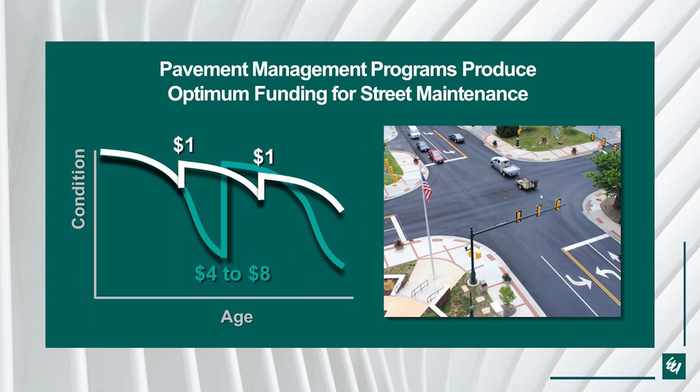The idea is that preventative maintenance can be done incrementally to extend the life expectancy at much lower life cycle costs, and that's shown with the white curve there. So we're going to explore this in terms of how we can measure the condition, what types of programs we use to extend the life cycle, and then how we can optimize that.

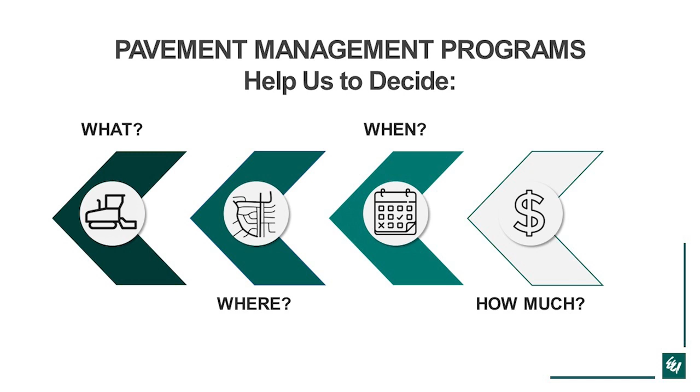Pavement management programs help us decide what to do, where to do it, when to do it, and how much it's going to cost. So that's kind of a forward viewpoint of the process—what are we going to do, where, and when? And then based on that, how much is it going to cost?

One of the advantages of pavement management programs is that, through software applications, we can actually do the reverse. We can decide how much we want to spend, and then the programs will tell us what, where, and when we should spend it. That's part of the power of this—being able to run different scenarios using the software programs.

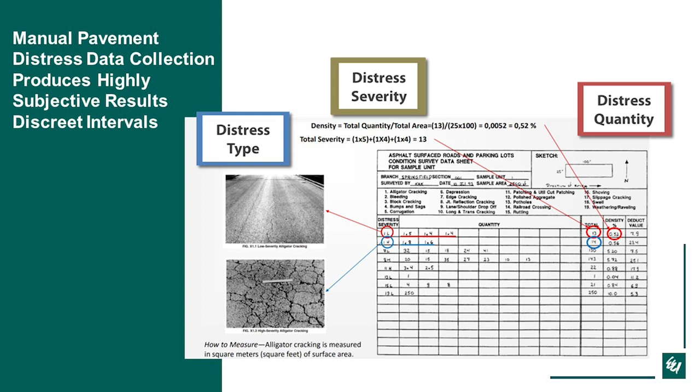And you can imagine how much time that would take for a community with 30, 50, 100 miles of roadway. So this is kind of the old style. It was pretty subjective, and it takes a lot of time, and it's only incremental. It's only done over certain representative areas.

Today's technology uses lasers, GPS, and video technology to get a continuous record of the surface condition. And there are deflectometers which can measure how the asphalt responds to an impact, which gives you an idea of the condition of the base and sub-base. So we can identify the surface condition and the subsurface condition.

In most instances, we talk about the surface or overall, and overall is surface and subsurface. So that's important to recognize when you're looking at a pavement condition index map. Is this map surface only, or is it overall, which includes the subsurface?

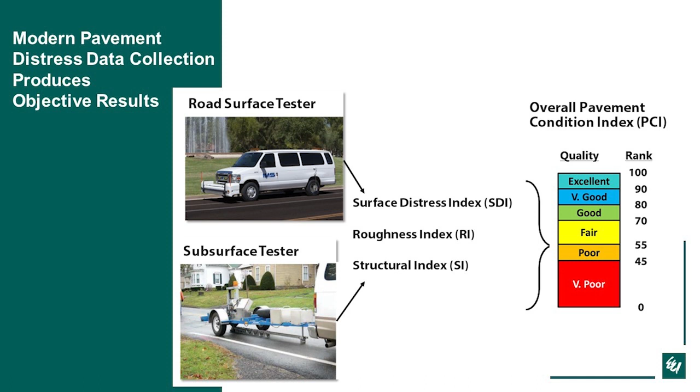The data acquired is then processed, and each block in the survey is assigned a pavement condition. You see on the right the quantitative rank from 0 to 100, and then qualitatively from very poor to excellent. We always use these same colors, and these colors carry through, so you'll see them on maps and other displays.

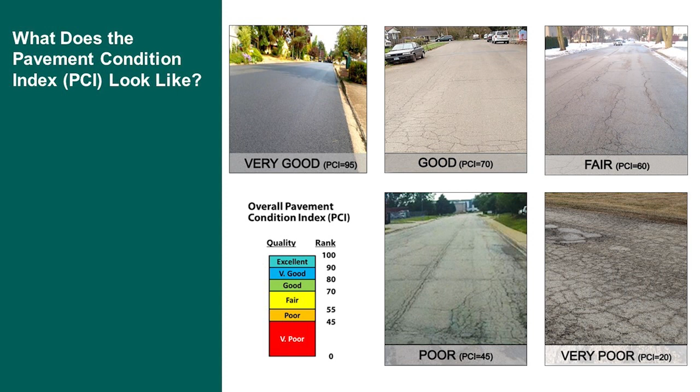And then into your poor, which is a PCI of 45, and then very poor, which is down below that 45. So in most instances, that fair is about the cutoff for where we want to start looking at perhaps resurfacing. We don't want to let it get into the very poor condition, because that's allowing moisture into the base, which is creating a problem that even resurfacing won't address.

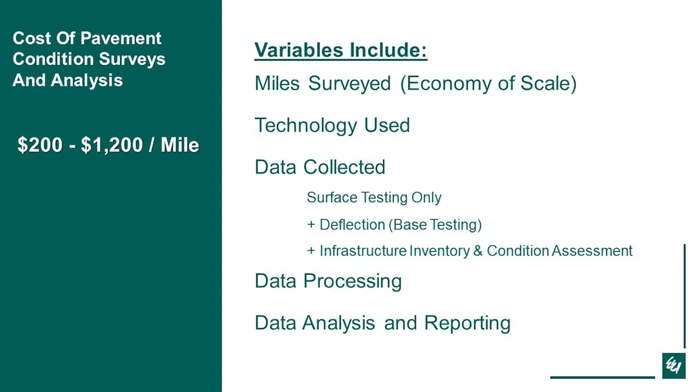And then, of course, the processing and data analysis and reporting. Many times you'll hire a contractor based on a bid and then use that data either in-house or with your engineering firm to interpret it and help you in developing your 5- and 10-year capital improvement programs.

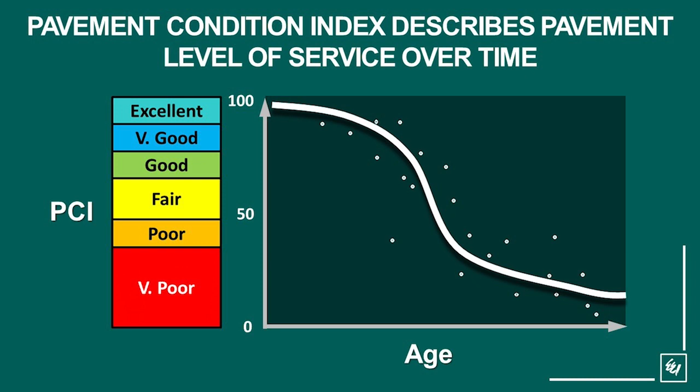The best case is when you've gone and done several surveys and you have the results on a block of roadway, and you can plot them over time, typically 3 to 5 year increments. So you can imagine if you could see a new pavement surface and how that deteriorated over time, that would be very beneficial in terms of predicting when maintenance or resurfacing would be needed.

Timely maintenance helps extend the useful life of our pavement. As mentioned, that normal degradation curve, resurfacing and then going back to degradation with no pavement maintenance is shown by that curve. What we would hope to accomplish is to intervene in that deterioration before we reach that break point and keep our pavement condition up and extend the overall life cycle. So how would we do that?

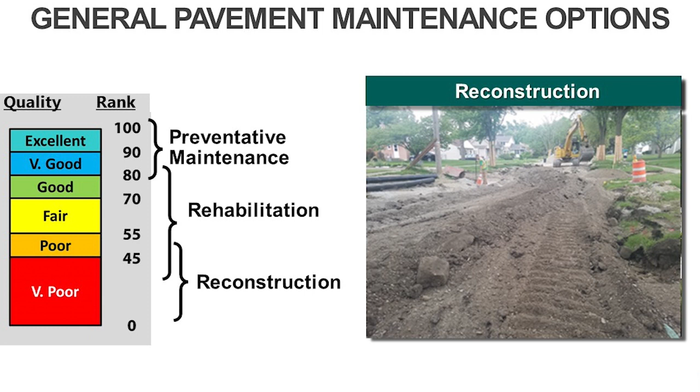We would do that through preventative maintenance programs such as asphalt rejuvenators or microsurfacing. Those things would be preventative maintenance in nature, and they would be done when the PCI is up pretty high. If the PCI was allowed to drop down, we would go into a rehabilitation phase where resurfacing or hot mix in place would be applicable. Chris will be talking about these different maintenance options in more detail in the coming presentation, but just to give you an idea. And lastly, if we've allowed the pavement to deteriorate and we've got subsurface that needs to be reconstructed, we're talking about a significant amount of money. So that's the pavement maintenance options we're looking at.

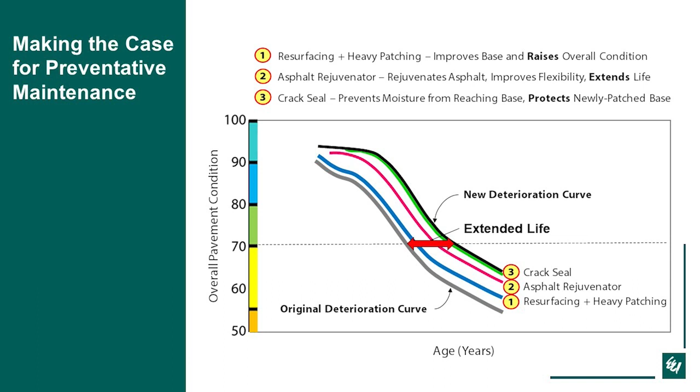The second curve here is shown with the asphalt rejuvenator. So now if we add asphalt rejuvenator, in those early years it stays better longer, and the curve gets moved out a little bit, with the top part staying a little bit higher. The last part is the crack seal, which helps prevent moisture from getting down into the pavement. Applying these pavement maintenance activities throughout the life cycle creates a new deterioration curve, and that curve represents an extension of the life cycle.

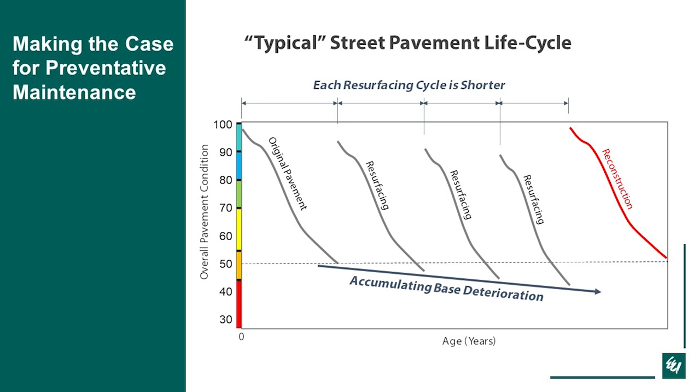If we take that idea and apply it to a life cycle of pavement, it might look something like this, where the original pavement would deteriorate over time, and then we would have a resurfacing, and so on. As we go through that cycle, each time the subbase deteriorates a little bit more, so the curve gets a little bit deeper. It's a little bit harder, that's why eventually we have to reconstruct. The cycles in which we have to come back and resurface are closer together, fewer in years, so the pavement surface doesn't stay at a high level of service for long, and eventually we have to reconstruct.

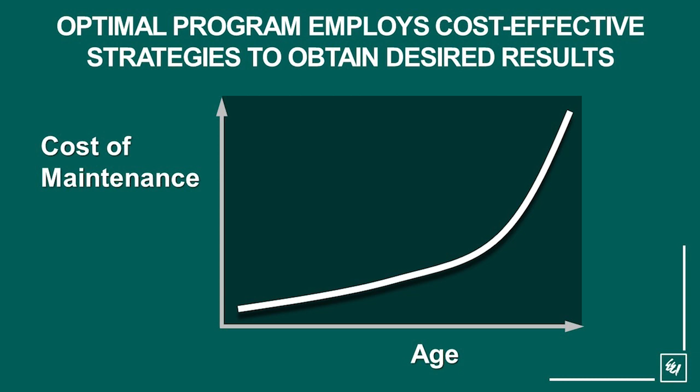So we've talked about measuring pavement deterioration, and we've talked about ways to extend the life cycle. Let's add costs now. What we see is that the cost of maintenance increases as the pavement gets older. There's a break point there, and that break point is when you have to resurface, and obviously there's another break point where you have to reconstruct. When we look at the cost of these different maintenance activities over time and how they relate to the PCI, we see this change in the investment that's needed.

In the case where we're doing preventative maintenance—asphalt rejuvenator, crack sealing, and microsurfacing—we're talking about $1 to $7 per square yard, up in that high level of service. We get into rehabilitation, primarily resurfacing, at much higher costs, and then reconstruction or full depth reclamation is even higher still.

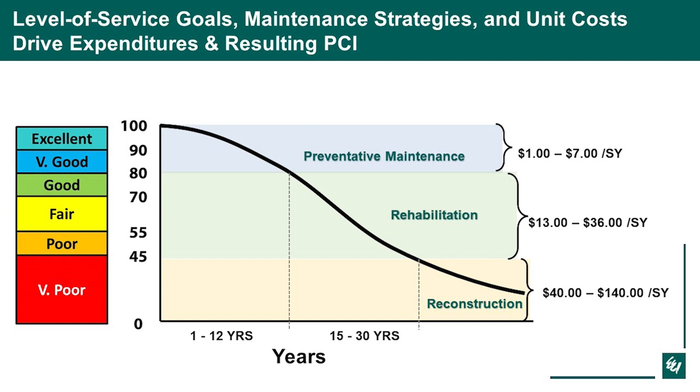But realizing that sometimes streets do get to that point where you need to reconstruct. With this ideal distribution, they were able to establish what their goal was, and then run different permutations through the software to see how they could get to that goal. Some of those permutations are exemplified by this decision tree, where the user—you, the community—decides at what level you would apply what strategy.

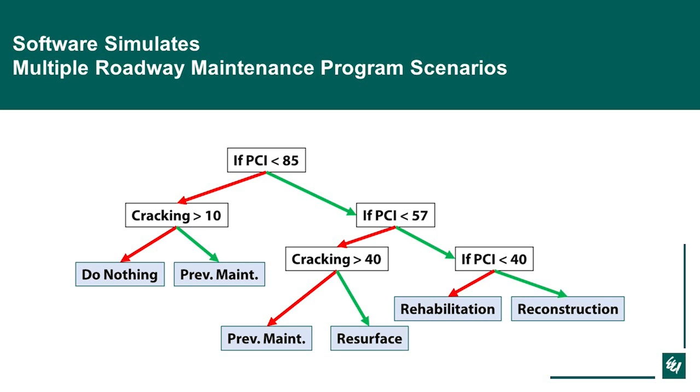In the end, it's all about putting that CIP program together, right? It's that 5-year program, and where are the streets that we're going to be resurfacing or maintaining over the next 5 and/or 10 years. This is an example of one of the communities we've worked with and their 5-year CIP for roads. What you don't see here is that this is a result of both the software saying what was needed to be done, and the interpretation of the engineer and the client in determining what program they wanted to implement.

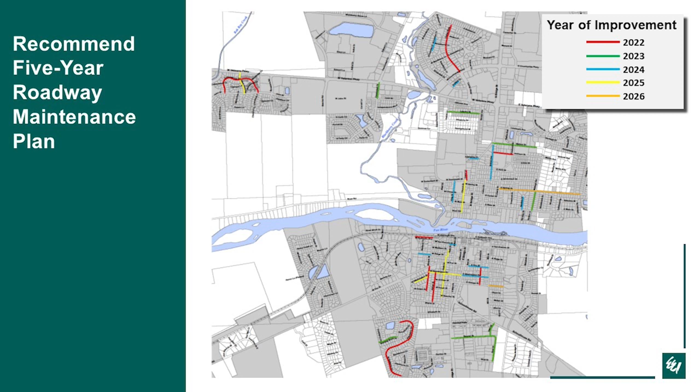So it's a combination—we don't just take what the computer says. We also look at that, particularly in terms of grouping streets together, because we know that when we have a number of streets located close together, we'll get a better unit cost. That's part of the strategy to stretch our roadway dollars.

So in summary, the pavement condition allows us to see how pavement deteriorates over time. We know that we can do maintenance activities and extend that life cycle, and that we can do that in a timely basis that will actually save us money in the long run, optimizing and stretching our dollars that we're spending.

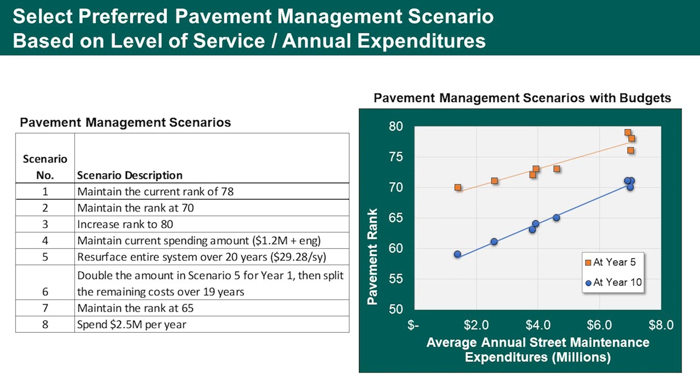We've done that at two points, at 5 years and at 10 years, and this is how it changes. So if you're taking a 5-year window, are you taking two fixed points to say this road went from 78 to 70, or how are you doing it? Yes, yes, it's from current to 5 years out. Look at that, how much did we spend to get here, and what's the overall PCI? And then 10 years.

Very powerful. You can do all kinds of different permutations, and that decision tree can be modified. Chris is going to talk a little bit more about how that works in terms of how it relates back to the preventative maintenance program.

So what program was used for these graphs? This particular program, we use Paver Pro, but we also use Paver, kind of the bare bones. I know there are several other interfaces that are really kind of user preference. The data is pretty standardized now, but how it's displayed and the decision trees is software dependent, so there's a lot of different software out there. Some are very engineering specific, some are more intuitive. That's why going through that selection process is really valuable, because you get to see what do the different screens look like, what do I have to do, how many clicks do I have to do, and so on. It's very valuable to go through that process.

All right, thanks, Brad. As Brad said, we're going to go over some roadway rehabilitation and maintenance options and how to utilize the pavement management software. Then Joe's going to go into some detail on the design engineering and pavement maintenance related items.

So first thing we're going to talk about is how to utilize the pavement management software. You get a lot of data through the software. We're going to go through how to implement that data and interpret it to come up with what your rehabilitation options might be.

We'll go through how we determine what rehabilitation options to do, whether you're going to do pavement resurfacing versus pavement reconstruction. Then Joe will talk about the design engineering that goes into that based on which route you choose, and we'll talk about preventative maintenance as well.

So first, just utilizing the pavement management software. Any roadway inventory data that you can have is going to go a long way to help you interpret the data. So when was the original road constructed? When was the last year it was rehabilitated?

Roadway functional class—is it a collector versus residential versus arterial? Why those are important: obviously original construction year is nice to know, along with what has been done to the road throughout its life cycle.

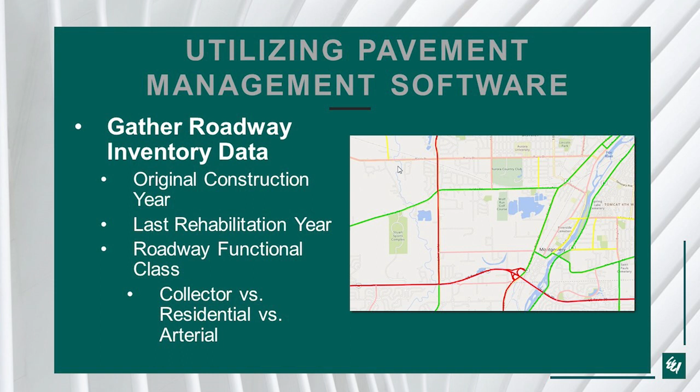Obviously, typically you probably want to maintain a higher level of service and not let your PCI drop as far on your collector and arterial streets versus your residential streets.

Other important information would be obviously roadway type—that's going to determine what sort of rehabilitation options you might have. Analyze your drainage conditions: is it a rural pavement section versus curb and gutter? That will change your cost per square yard that you'd typically use in the software.

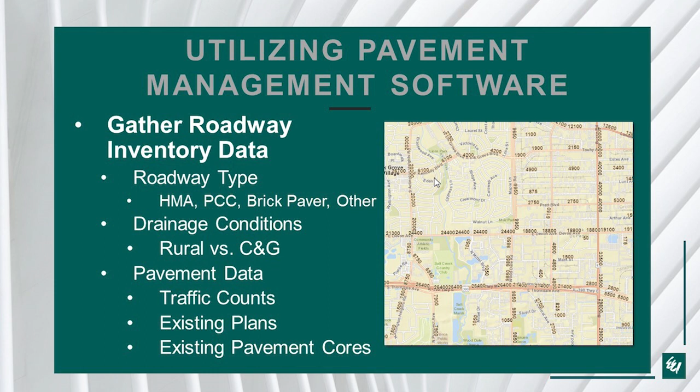To determine your cost for each roadway, any existing pavement data, traffic counts, existing pavement information, and existing plans will tell you what the existing pavement structure is. Is it adequate? Was it based on an older standard and you want to update it to a new standard? All that goes into determining what rehabilitation method you want to use.

Once you gather all that inventory data, you can use the program to analyze different things. The program will tell you how much of a certain distress you have in a specific area. What's powerful about that is you can analyze those types of distresses and their severity, which gives you an idea of what's potentially going on with the pavement.

Then you want to analyze your current PCI rank, look at the curve, and it'll age out your future PCI rank to see what it's going to be if you don't do anything to the street in 5 or 10 years. You can analyze the subsurface conditions and base conditions, and ultimately the software will provide you with a recommendation for what to do to each street.

And then you can use your engineering judgment to determine if what the software recommended is appropriate, or if you want to try and do something different based on the information that you have.

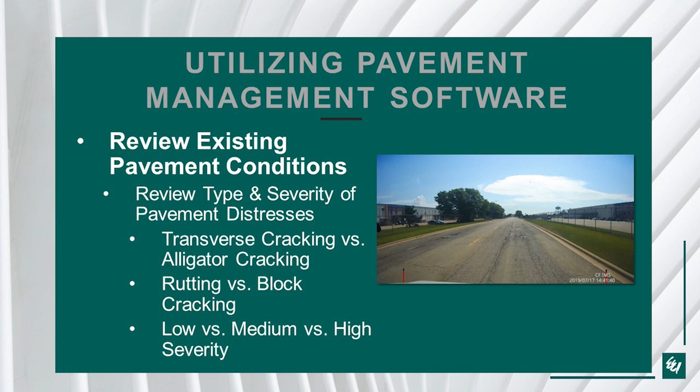What's important is to determine those types of distresses and what they mean. So transverse cracking versus alligator cracking, that's a difference between whether you have an issue with your base potentially, or if it's just an issue in the surface. Same thing with rutting versus block cracking, and I'll go into examples of what those look like. The severity is important because obviously a high severity is going to be a lot more important to fix than a low or medium severity.

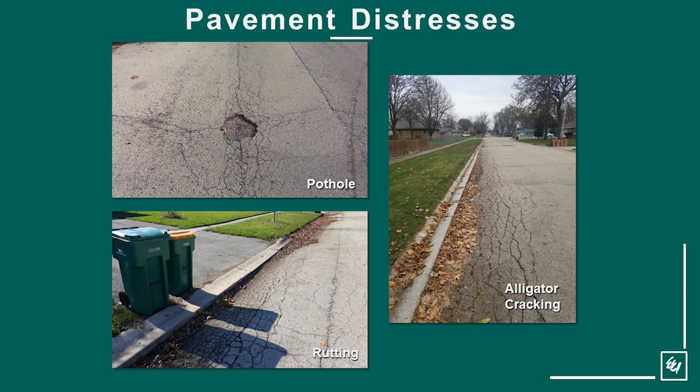So here's some examples of some pavement distresses. Obviously potholes, we're all familiar with those with our amazing winters. Alligator cracking there on the right, that's usually an indicator that you possibly have some base failure and moisture in the base causing that cracking, as well as the rutting there in the bottom left. That would be a red flag that you're going to have to do at minimum probably some sort of undercut or base patching there. You won't be able to just resurface over the top of that.

Versus some of your more just surface cracking, transverse and block cracking is typically because of your freeze-thaw cycles where you just get cracking on the top layers and weathering due to traffic and the winters that we have.

So taking all of that information together, we analyze all those things to determine what we want to do to each street. The first step would be coordinating, reviewing the recommendation from the pavement management software. Does it make sense? Is it something you want to do? For instance, some communities don't want to reconstruct the cul-de-sacs because they get low traffic, so you might say even though that's what the software recommended, we're going to just do a resurfacing there.

You want to do your data collection, get your existing data, try and gather any existing plans or information on the roadway, get your geotechnical engineering done, pavement cores for sure. What's shown there is some pavement cores, and what's important about that is it will tell you what your existing pavement section is - how thick is your existing asphalt, how thick is your sub-base stone below. That will tell you a lot of times whether or not the existing pavement section is adequate based on the traffic and the roadway functional class that you have.

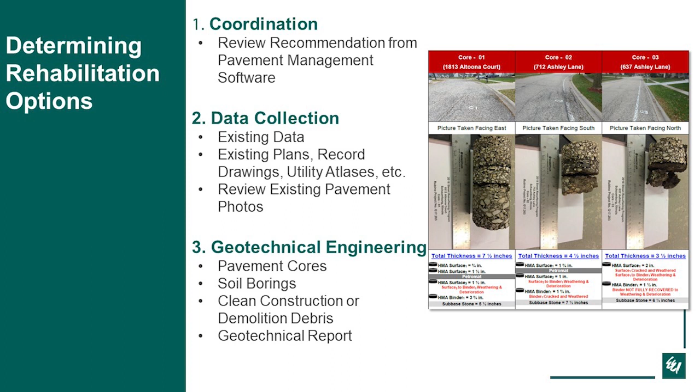Another important thing about the cores, when we get into some of the other things we're going to discuss, is about existing pavement interlayers such as Petromat or other fabrics, because some alternate strategies can't be done with those fabrics in place. If you think you might have pavement reconstruction, you want to get soil borings to understand what the subgrade below the roadway is. You want to do your CCDD, or clean construction demolition debris, to make sure you don't have any contaminated soil that needs to go anywhere. Then get your full report to analyze what the existing subgrade and pavement conditions are.

Then the fourth step would be to determine your roadway rehabilitation options. You want to make sure you're determining the correct and most efficient rehabilitation technique. You don't want to be over-designing, but don't want to under-design either, based on all the information we've talked about. Then utilize the pavement management software.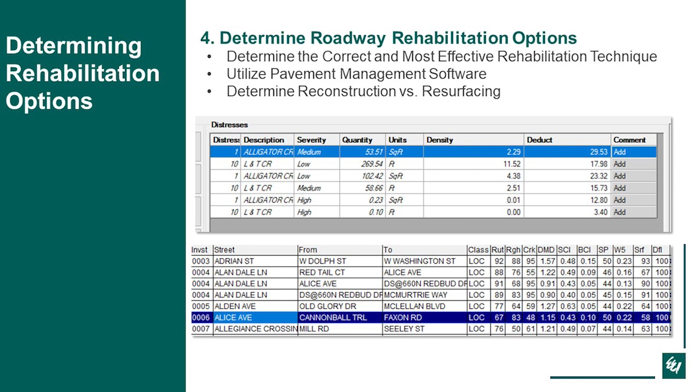So that would tell you that your base is good there, but your surface needs to be resurfaced, which makes it a candidate for a resurfacing project. At this point, you're faced with deciding whether to do pavement resurfacing or pavement reconstruction. First, we'll talk about pavement resurfacing options and an alternate cost-effective solution called hot-in-place recycling, and then we'll also talk about pavement reconstruction.

Pavement resurfacing - I'm sure everyone is familiar with this - is your traditional standard mill and overlay with varying thicknesses. Obviously, the more you mill off and put back, the more expensive it is, but it provides a new wearing surface. Costs can range anywhere from $18 to $36 a square yard, depending on factors such as curb and gutter condition, ADA requirements, whether you include sidewalk repairs, and your patching percentage. Generally, the average cost is about $27 a square yard on most of our projects.

The patching percentage is where, with pavement management data, we can tell you if you might have base problems. You can do heavy patching to try and fix that base, which is traditionally cheaper than removing and replacing all of the existing subgrade.

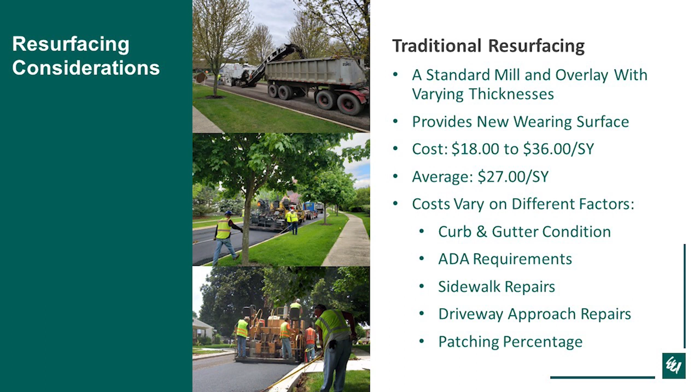For concrete repairs, each community has their own standards, but at a minimum you typically want to fix anything that's not draining. You'd also want to fix curbs with existing cracks, since moisture gets through into your base. Everyone knows you have to upgrade ADA sidewalk ramps to the most up-to-date detail. Whether you add trip hazard or other sidewalk repairs is community dependent, but it's typically more cost-effective to do it while the contractor is there rather than in a separate program.

For patching repairs, standard is usually to add 3 to 5% in case you run into issues after milling the surface. But if pavement management data suggests additional base repair, you might want a heavier amount, 10 to 15%. The thickness will vary depending on whether you go all the way down to the base, do base removal as part of patching, or do undercuts and patch back - those are all options.

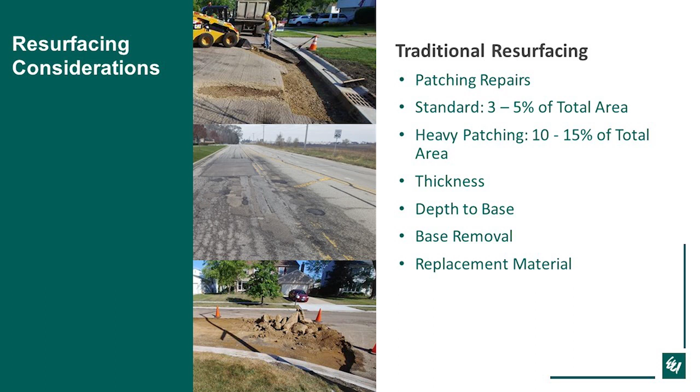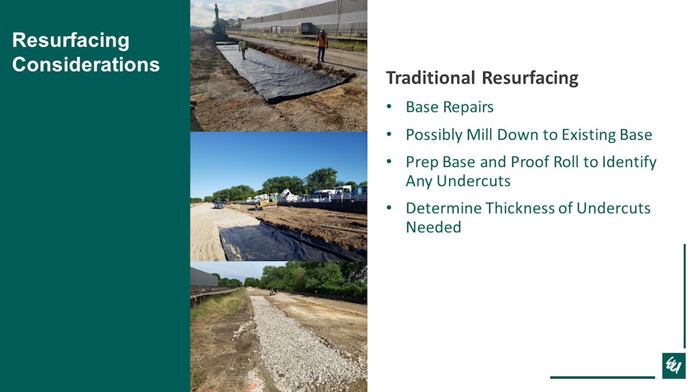Sometimes it's more cost-effective to just mill all the way down to the existing stone, proof roll, do any undercuts, and resurface the road. This works for a road that was built with only 2 or 3 inches of asphalt on 12 or 13 inches of stone, and you want 4 or 5 inches. You might mill off the whole section, including some stone, proof roll, do any needed base repairs, and pave back over whatever thickness you want. This is often much more cost-effective than an entire reconstruction that rips out all the existing stone and pavement section. Those are all the different resurfacing considerations for traditional resurfacing options.

An alternative is hot-in-place recycling. This uses a train of equipment that heats the asphalt back up to 300-400 degrees into a working condition. A scarifying unit goes through and scarifies off about 1.25 to 1.5 inches deep. It then goes through a screed, gets paved back down, and you put a new layer on top of that.

For curb and gutter areas, you need to mill off whatever thickness of wearing surface you want to put on - so if you want 2 inches of surface, you'd mill 2 inches first, then do the hot-in-place recycling. There is a high mobilization cost, so you'd want a fairly large section of roadway to make it worthwhile - you wouldn't want to just do 1 or 2 blocks.

There's a long equipment train, usually about 40 feet, with the unit that heats the asphalt back up, the scarifying unit, and then a unit that adds in an asphalt rejuvenator and paves it back down. With that, it's a little difficult to get around really sharp curves, and obviously you can't do it in cul-de-sacs.

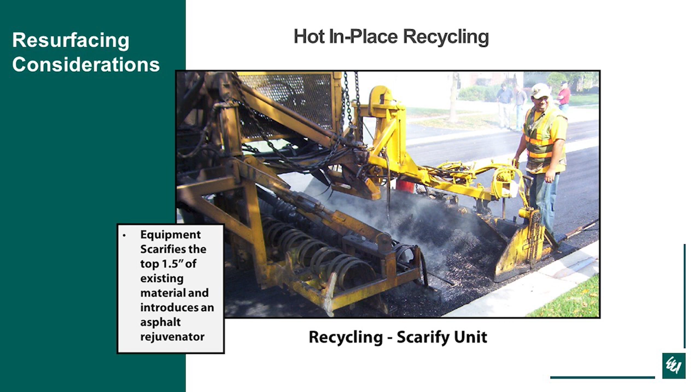There are little tines that go through and scarify the asphalt up to about 1.5 inches, and that's where they introduce the asphalt rejuvenator. Then you use a standard paving screed to put the recycled material back down to your standard compaction methods, and then overlay with a new asphalt surface.

Typically this can save you money because you're not replacing that 1.5 inches of existing asphalt, you're just reusing what's there. So the typical costs with your overlay and concrete improvements can be anywhere from $14 to $20 a square yard.

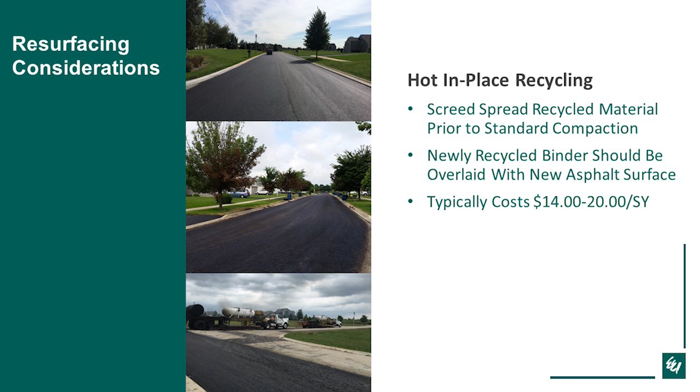Based on the information discussed earlier, if we determine that pavement reconstruction is the correct route to go down, you'll have to completely grind off the existing pavement, then typically remove and replace the existing base course, proof roll the subgrade, and maybe make repairs to the subgrade. Obviously this is typically a very timely project.

It takes a long time for the contractor to remove all the material and get it graded out, and it has a great impact on the residents. It's extremely expensive because you have to haul off all the material to either a CCDD facility, or if you're unlucky and have contaminated soil, to a non-special waste facility.

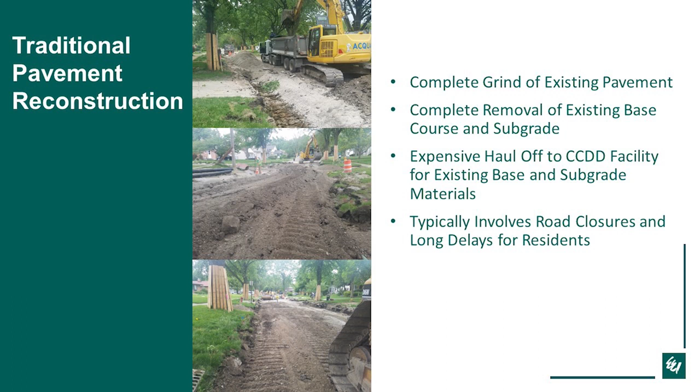Then obviously it typically involves road closures, possibly detours, and typically doesn't make people very happy. But sometimes that's what's needed and recommended in order to get the lifespan you want out of the roadway.

Sometimes you make adjustments to the existing profile to be able to get the road to drain properly. Sometimes it involves utility improvements such as water main or storm sewer replacement, or sanitary sewer improvements.

Your typical costs can range anywhere from $75 to $140 a square yard just for the road portion of it. That would not include any utility improvements.

So what we're going to talk about is an alternative to that when it makes sense, which would be to do full depth reclamation with either cement or lime stabilization.

In this option, you are again completely removing down to whatever depth of asphalt you want. So if you want 6 inches of new asphalt, you remove 6 inches of existing pavement, which could be existing base.

Then you would utilize the existing base material and implement an additive to strengthen your base into a new base, basically, and then pave over the top of this. It does require you to do a detailed mix design to determine how much of the additive you need to add.

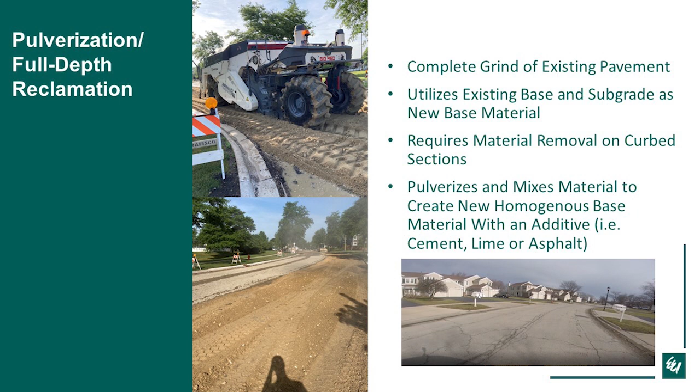This particular project was an area where the community had existing pozzolanic base and a lot of issues with freeze-thaw. We were able to use full depth reclamation to remediate that and put it back down. It was more cost effective, and they were also able to get it done a lot quicker.

They were able to do the full depth reclamation for this project in 2 days, as opposed to probably 2 or 3 weeks worth of doing the traditional reconstruct.

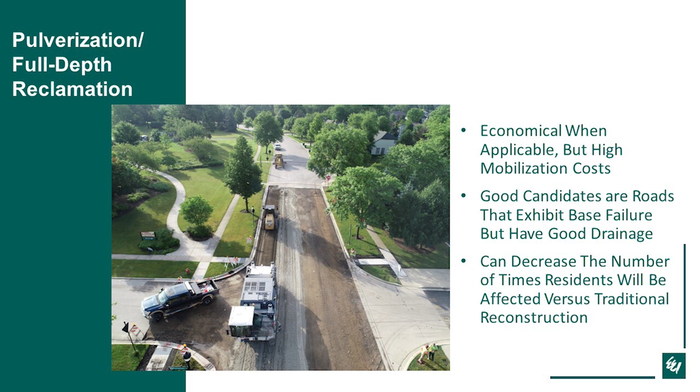As discussed, this will greatly decrease the number of times residents are affected versus traditional reconstruction. It's able to be done under traffic, and once they're done with the reclamation and the cement, residents are able to drive on it the same day while the cement's curing.

One thing you want to do with full depth reclamation with cement is check whether you need to do micro cracking. If the full depth reclamation gets too strong, you come in and take a roller to micro crack the top, which prevents the base from acting like concrete and gives it more flexibility so you don't have as much heaving issues.

It typically costs from $40 to $65 a square yard, depending on how much overlay you add and how much concrete improvement you perform.

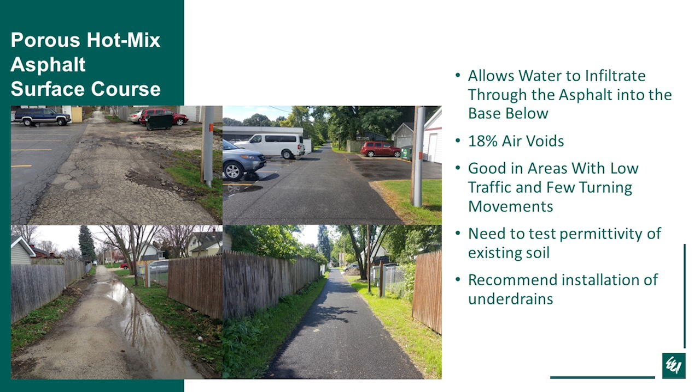Obviously, because the structure of the existing asphalt is very porous, it's not a good candidate for areas with high turning movements and high truck traffic. In this case, there were very few turning movements required, and it was just a residential area with residential cars. So now Joe is going to talk about some of the design engineering.

Does anyone have any questions before I pass it off to Joe?

I was wondering, for the base ratings, what type of testing do you suggest for that with the pavement management program? Okay, so the question was, what type of testing do we recommend for the base conditions?

Typically what they'll do is what's called a falling weight deflectometer test. They'll apply a load, typically done once every block, and they'll have 4 or 5 sensors that pick up how that load is deflecting the pavement, but also the base and the subgrade below. That would be what's typically recommended when you do base testing.

Is pavement age a factor in the hot in place recycling? I would say pavement age and condition would be important. Obviously the older the pavement, generally the more rejuvenator you're going to have to add in because you've oxidized and lost a lot more asphalt than if it was newer.

The other thing is, typically the way I'd think about it is the way it looks below is kind of what it's going to look like when you put it back in. You're not generally adding any extra material, so you want to make sure it doesn't have base failure or any of those issues if you were going to use that option.

For the reclamation, how much does the base design or existing condition impact the applications? From the photos, it looks like you had a compacted soil sort of base with maybe a couple inches of stone. Could you clarify a little more? I was trying to determine, there doesn't look like there's a lot of undercuts or additional excavation in these photos for this reclamation process, so is that soil that's existing and being compacted, or is it soil that's been brought in?

That's existing aggregate base course. In this case, it was existing aggregate base course and pozzolanic base that got ground up and put back down, and the cement and water got all mixed together to make a new material. So that's what that picture that's getting graded is showing, that's the new base that's being used. That makes sense.

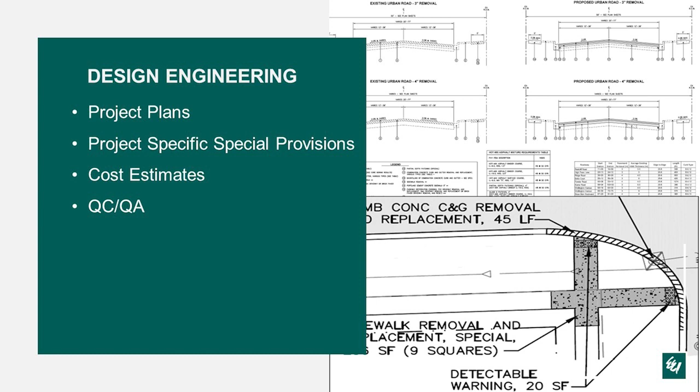And then QCQA, the cornerstone of good quality work, is a necessity on every project. So we would do this, hopefully with someone that hasn't been looking at it - a fresh set of eyes is the best person to QA a project. They can catch things that the normal designer, who had been looking at it for months, won't catch.

Oops. My fault there. There we go.

ADA compliance. So up there's an example of a sheet that our field guys take out to the field. They use their smart level, go and start measuring the slope of the squares, and we fill out these corner sheets, come up with the best design for replacing those ADA ramps.

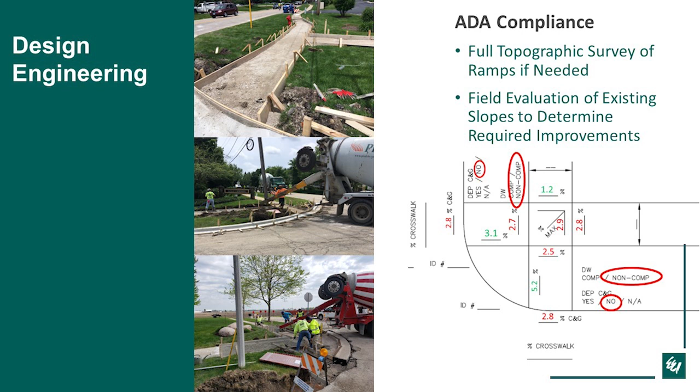Sometimes a full topographic survey is necessary because the area is steep or whatnot, and sometimes you'll have to put up curbs in order to make the ADA work, and sometimes you'll have to replace several squares back from the corners. So we do all that in design.

The project plans and specifications - Rebuild Illinois funds, bond funds, which I'm sure you're all familiar with. Any projects that are utilizing those funds need to have plans and specifications. Also, any projects that are considered by IDOT to be a construction section and not in a maintenance section would require plans. But if you're just using MFT funds on a maintenance section, you would just need a bid package and specs.

Typically in those specs, we would put exhibits showing typical section exhibits showing what the work is going to be done. We'll have exhibits showing where the ADA ramps are that are to be replaced, but they wouldn't be a detailed set of plans.

So resurfacing considerations. If you're going to be resurfacing, obviously the overlay thickness - Chris had brought it up - are you milling off 3, putting back 3? Are you milling down to the stone? What asphalt mix are you going to be using? Do you have your own municipal mix? Some do. What type of aggregate and bitumen are you going to use? Do you have a unique mix design that you want to use on specific streets?

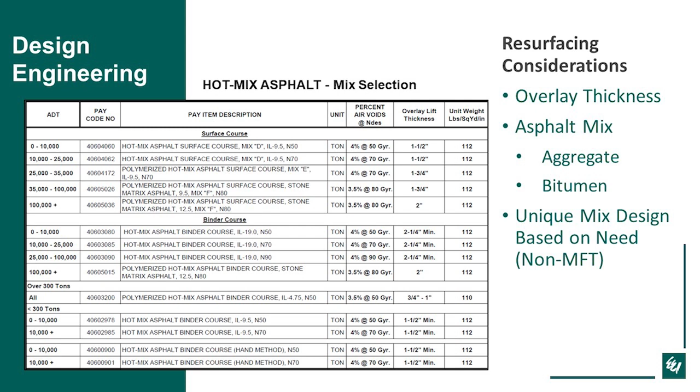Longitudinal joint sealant, it's something that's newer, but most projects - it's actually an IDOT standard now. It increases the density between paving passes, so wherever your paving joint is going to be, you put that down on the binder before you pave surface. And it helps prevent water from seeping down, because that first crack down the middle is usually the first crack you see. It increases the density of the pavement there and prevents the water from getting down deeper into the binder and then eventually into your base.

So a lot of projects are using this these days. We use it quite a bit. IDOT's using it now. It's definitely a good method to keep those joints dry.

Then we got the reflective crack treatment. Between the layer of the surface and the binder, you can put a polyamide type binder, or a fabric type material, in between that layer that acts similar to the longitudinal joint sealant. It prevents - helps keep the cracks from protruding below into the binder course of the pavement.

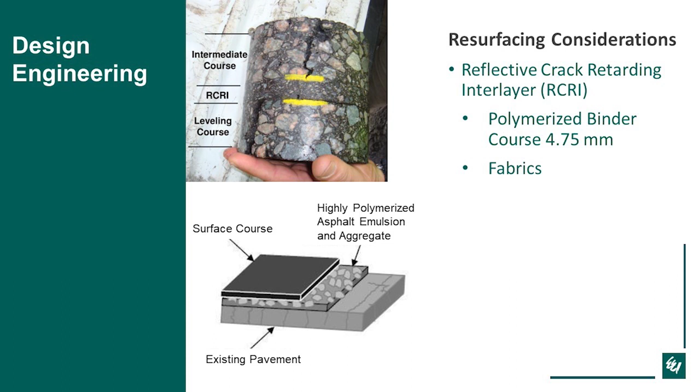And then here is a good pavement from 8 to 10 years. The center line crack is now well into the pavement structure. You're starting to see other cracks develop on the outsides and in the middle.

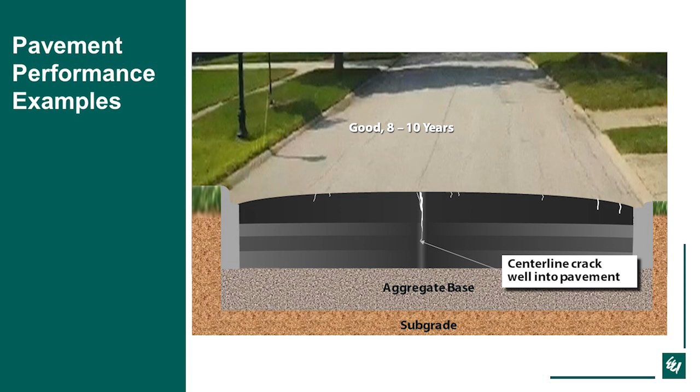And then here is a poor, 15 plus years pavement. Your center line crack has made it all the way down to the base, which is not good because water is reaching there now, and you have a lot of other cracking that's happening across the pavement section.

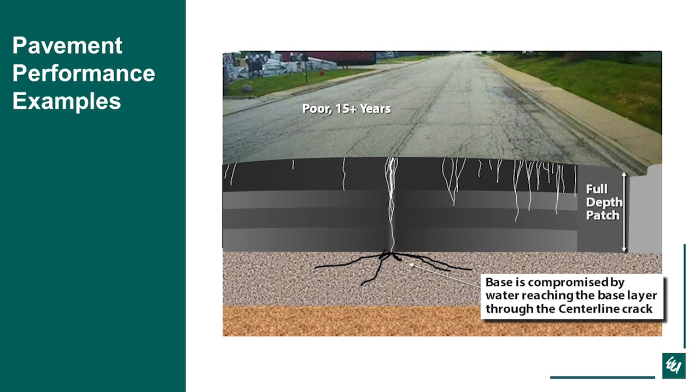Crack sealing, everybody's I think familiar with this one. It's utilized pretty much everywhere. It prevents water from penetrating the base. You're going to want to seal the cracks as you see them. A lot of municipalities will have a crack sealing program to go out and crack seal as soon as, after the winter, find cracks, seal them right away. It can't hurt. You're going to prevent that water from getting to the base, and that's what you want. You want to try to stop that as soon as possible.

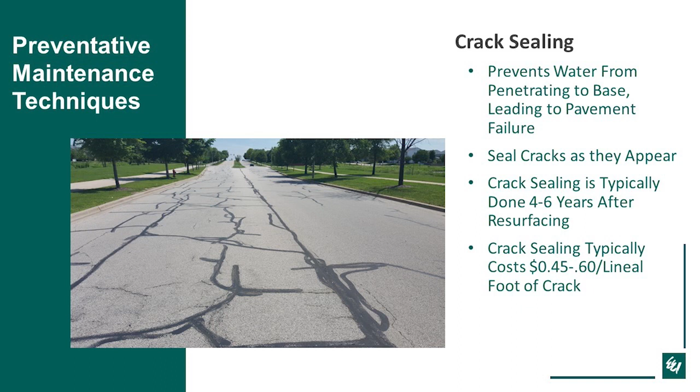Microsurfacing, it's another preventative maintenance option. It's typically done around the 8 to 12 year mark. You're gonna want to crack seal and do any patching prior to doing this microsurfacing. It's an application of a thin layer of emulsion.

It's ideal for roadways that have higher volumes of traffic without difficult application areas. So areas where the road is real curvy, there is a bit of an equipment train here, so it does have difficulty getting to those tight corners, even though you can still do it by hand. It's important to know that if you do it by hand, the surface doesn't come out the same as if it's placed mechanically, so there will be a little difference in color and whatnot.

It's also important to do a little public outreach on this, mostly because of the sand, just so people realize why the sand is there. It will be vacuumed up the day after, but people will drive over it, so it's important to have a little public outreach. It typically costs between $4.50 and $7 per square yard.

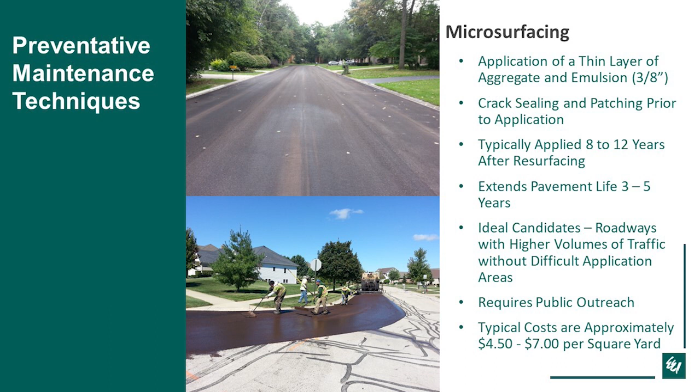So going back to Tim's curve, here's a typical deterioration curve showing PCI versus age. And then here's what the new deterioration curve could be if you do preventative maintenance. You can see the curve at the top is flatter. It keeps the pavement PCI higher, and you extend the life of it.

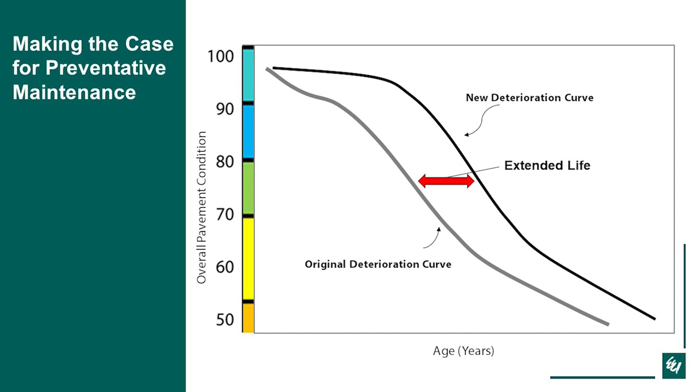So in conclusion, utilizing the pavement management software is the start of your CIP program, determining the proper rehabilitation methods. Are you going to resurface? Are you going to microsurface? Are you just going to mill off 2 and put back 2?

Your design is important. It can give you good unit prices, the timing of when you bid the project, making sure all your items are there. It'll prevent overages in the field. You'll be well aware, you'll be able to budget well with a good design. And then obviously the pavement maintenance can optimize the life of your pavement, and it could intercept that deterioration curve and extend the life of your pavement.

Is there any questions?

What are your thoughts on routing as part of the crack fill project? Is it recommended, or do you just crack fill without doing the routing? So the question was how I felt about routing.

I personally think, and I'll let Chris chime in too, that it would depend on the width of the cracks. If they're wider, you really don't need to route it, in our opinion. But if they're gonna be narrow cracks, I think routing would make sense because you're not gonna get it down in there enough.

Thank you, Brad, and thank you all for being here today. As Brad mentioned, my portion today is on effective design, implementation, and construction management.

You've spent all the time and money to evaluate your roads, prepare your pavement management plan, and budget your work, but it's important that you have a plan to effectively implement the design and then actively manage the construction. I know there's a lot of construction experience in the room, but I just want to discuss a few keys to keep in mind to get the most out of your roadway projects.

As Brad mentioned, I've been at EEI for 14 years, mostly in the field, so before I get into it, I know everybody can appreciate all the fun things that happen on roadway construction projects, so I just wanted to give a shout out to a few of my favorites that we've seen over the years.

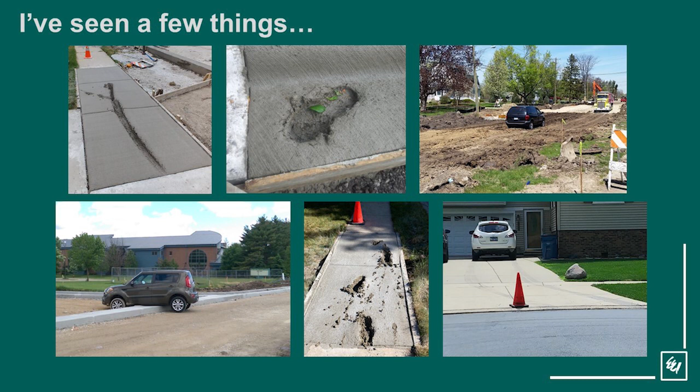So today's agenda, I'm going to try to hit a few key points along the entire process of the project, from pre-bid into pre-construction, and then a few aspects of construction, including flexibility, public outreach, having a plan, and material testing and QA.

So we're talking a lot about stretching your dollars. What does that mean? Stretching your roadway dollars means no dollar goes to waste. As Brad mentioned, the cost of materials is rising, 12.6% minimum. We see it every day. Costs are constantly going up. So it's essential that the dollars we're spending are being used effectively and in a deliberate manner, making every dollar count, achieved through effectively implementing the design and actively managing the construction activity.

I like to think of myself when I'm out on a job kind of like Moneyball. They set up the perfect design project, and I'm there to manage it to success. And this starts before construction even begins.

Touching on a few pre-bid items, I like to have solid specs. What does that mean? It eliminates contractor arguments, limits resident complaints, and we tend to learn from past programs. What did we argue about with the contractor last year? Then we implement that in the spec for the following year.

A few examples of these: when ADA sidewalk lowering or sidewalk reconstruction became part of all the design projects, when you have to lower the sidewalk maybe a foot to make it compliant, where does that material go? The contractor might argue that's extra excavation. So including things like that in your spec limits arguments.

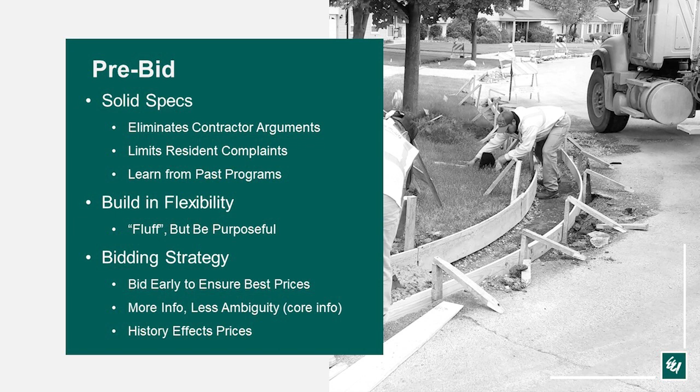Another bidding strategy, as Joe mentioned, is that not all of our contracts require plans. So in the absence of plans, the more info you can include, the less ambiguity, the better pricing you're going to get. Some detailed information to consider: is the curb or sidewalk that you're going to replace accessible from the road? It's often overlooked - it's easy to just mark out sidewalk or curb on the plans to be replaced.

But if the contractor can't reach it, they don't know that they have to bring out maybe a buggy to get the concrete there, or they don't know they have to have some sort of special truck to get the concrete there. That's going to be an argument. So you want to have as much accurate information as possible - that's going to get better pricing and less arguments from the contractor.

We found that contractors remember these challenges - if you're constantly putting things in your plans where the contractor can't reach it, or it's a nightmare to do, they're going to remember those things, and you're going to see prices bump up over the years. So the more information you can add, the better off you're going to be.

So now you've bid the project out, and you're in the pre-construction phase. Ideally you're able to inspect the roadways before the design - that's not always possible, sometimes you're adding roads late, they're covered by snow, covered by leaves. So it's really important for the RE to perform a field review prior to construction - they're gonna go lay out all the removal limits accordingly. This is especially important when you don't have plans.

Oftentimes this is when residents give their input. A lot of times residents might not say anything, and then they start seeing arrows on the ground, sidewalk marked out in front of their house. They're gonna have questions - they're gonna tell you where the spots are that freeze in the winter that you might not know about, or where all the kids like to stand for the school bus that might need some sidewalk addressed.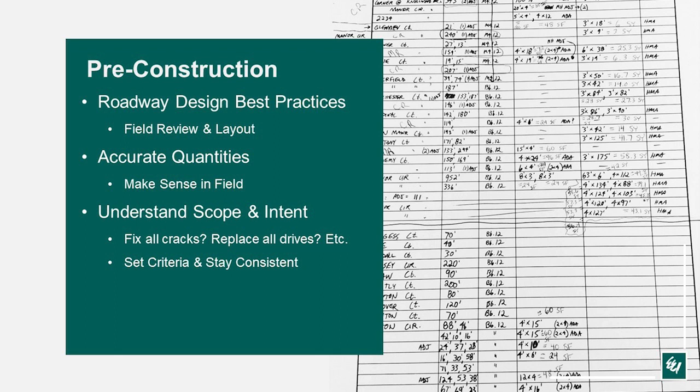We often recommend written policies. That's helped us in the past. So if you have a written policy on which driveways get replaced or which curb gets replaced, it goes a really long way with the residents. When you say, hey, the policy is drainage issues and major failures. If you have a written policy that you can show a resident, oftentimes that limits the complaints from the resident. Then they know it's being applied consistently, and that it's not like, why is Joe's driveway getting replaced and mine's not? You can clearly point to something to back yourself up.

So after you've gone through your pre-bid items, your pre-construction items, you followed all the design best practices and you've created the perfect design project, and now your field work's about to start, and we all know everything goes perfectly in the field, right? And there's an example of a perfect field project right there.

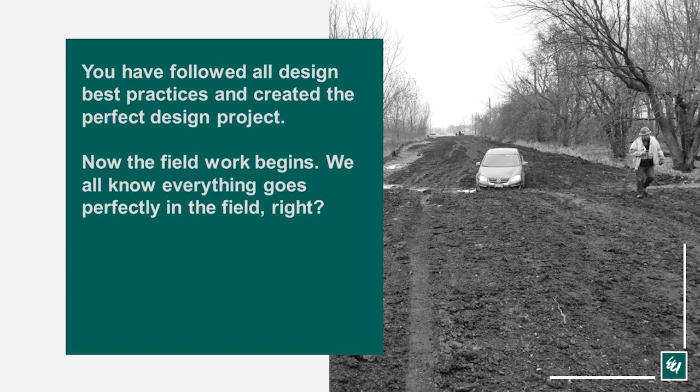That car was 500 feet down a road that was removed because Google told them to go that way. And it took 2 tow trucks to get it out. So I'm sure you guys can all appreciate that.

All right, so once you're in the field, a few things to keep in mind. Flexibility is key. Having the ability to add and subtract during construction is important based on your field observations, being able to react in real time. So having all of your measurements completed prior to construction allows for quick reactions, and it eliminates downtime.

So if you know right where your project is at all times, you can make quick reactions based on changing field conditions. Something that we try to do is have our borderline areas in our back pocket. So if something changes and you can keep maybe a piece of curb or some sidewalk you were expecting to get rid of, you'd have a borderline area in mind that you can right away mark out and get replaced. Or the flip side, if you're starting to go over those borderline areas that would be nice to replace but maybe aren't vital, you can start scaling back in those areas.

Something else to be flexible in the field is we tend to try to do a mill and evaluate strategy. Even if the pavement management plan says reconstruct or mill and resurface with heavy patching, some areas may have poor PCI or look like they need a lot of patching, but it's important to mill and then evaluate. So mill the area first, utilize proof rolls or your geotech sub if necessary, but there's no sense in doing work that doesn't need to be done.

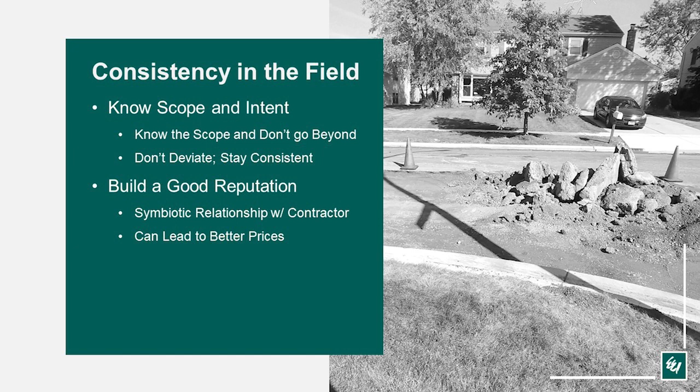We've seen with some of our programs, for instance in Schaumburg, where we're being consistent every year, you see those prices kind of go down or stay low every year. You're not seeing huge increases because contractors know they're going to show up and have a consistently run program with good design and good working relationships.

An often overlooked part of construction is public outreach. It's easy to forget, but the reason we're doing all these projects is to better the community for the residents. Taking care of as many problems as efficiently as possible is a good way to stretch your money, and you can do this with public outreach.

Keeping the residents involved and informed allows the most efficient construction. The more proactive we can be, the greater chance residents are aware of what's happening, the greater response times we can get to their calls and questions, the happier they're going to be.

Why is this important? Well, it minimizes mobilizations by the contractor and subs. There's nothing worse than you get through an entire street, then a resident calls saying their driveway needs to be fixed. You evaluate it, yeah it does, and now you have to do another mobilization for a concrete pour.

Or you go to pave a street and there's a car parked on it. Having resident involvement in public outreach minimizes slowdowns, gets rid of parking issues, gets rid of residents driving on prime. Without fail, every time I show up on a street to do road work, there's a guy moving or having a party, and you plan to mill, and now there's 40 cars parked on the street for a birthday party.

It seems to happen every year, and the more public outreach you can have, the less likely that's going to happen. The big plus to this is less time investment by village staff. If we're being proactive, reaching out to residents, they're not calling to complain, village staff isn't being brought in to deal with these problems, and you can have your time free to go do other things where your time is more valuable.

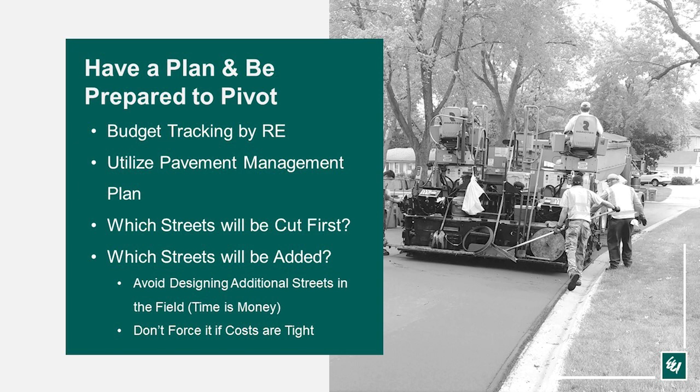But having them in mind prior to construction avoids us trying to do a last-minute design in the field. It ensures all problems are addressed. We find this is often a good time to tackle a dead-end street that's in terrible condition you haven't had a chance to get to yet, or that's not optimal as part of a project. You have an extra $50,000, get that extra street taken care of, get that dead-end street taken care of.

Or in the project area, if you have a minor bike path that needs to be replaced, things like that, you can tack it on at the end and really make the most of your money. We found contractors typically appreciate the extra work, so they're often willing to hold prices and add on that extra work for you.

If conditions are tight, though, don't force it — Murphy's Law seems to always apply. If you've got $50,000 and you're trying to do $45,000 worth of work, it seems to always end up being $60,000 at the end of the day. So don't force it, but if you've got extra money, being prepared to use it is a great strategy.

Something that's often overlooked as a strategy to stretch your roadway dollars is QA testing. Oftentimes we think of it as only minimal testing to ensure you have the right materials, maybe 25-30% of what the contractor is testing. But accounting for not only the minimum required testing but additional testing is a good way to ensure your materials are meeting spec — not just eking over the specs, but making sure they're really right there in the middle. This is essential during late season paving, if temps are dropping, making sure your materials are in spec.

Also planning to have the QA sub out there for more than just dropping a density test on the pavement and getting going. No, look at it. Are the temperatures right? Are we just meeting spec? Do we need to make plant adjustments, recommending plant adjustments? All those things are often overlooked to get the best materials for the project.

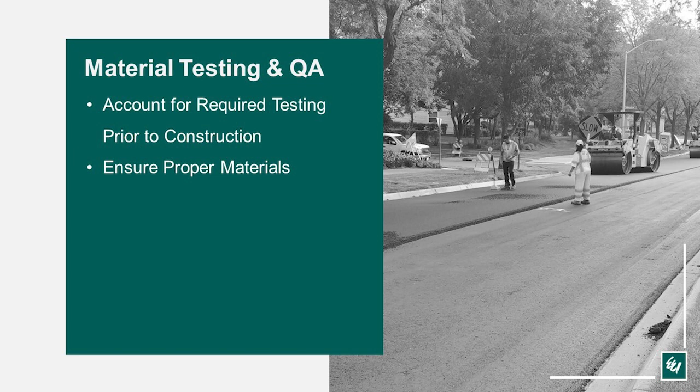They can also be useful to evaluate the base and sub-base conditions if questions arise, and it's a good way to have backup information. So come springtime, if a road starts failing prematurely, why is that? Well, if you've got a lot of QA testing to go back on and see, were we meeting spec? Was it just meeting spec? Was everything good? Were there other things at play here that caused this road to fail? So small upfront investments in QA can definitely save you large investments in the future.

So I just want to leave you with these points. Consistency is key - consistency in intent, consistency in scope, consistency in strategy, and being consistent with your public outreach. Being flexible, remembering to mill and evaluate and not use quantities unnecessarily. And then always having a plan, being able to adjust, and really actively managing your construction project. So I know I just threw a lot at you, so I'll open it up for any questions, funny construction stories - I always love hearing anything of that nature.

It was a perfect presentation.

All right, any questions for Kyle?

You have your sod restoration issues - how do you typically handle restoration in the field to make it more effective? We seem to struggle every year with restoration, either the sod is bad or the seed blanket didn't take, and you're just fighting every year. Do you have any strategies to make that better?

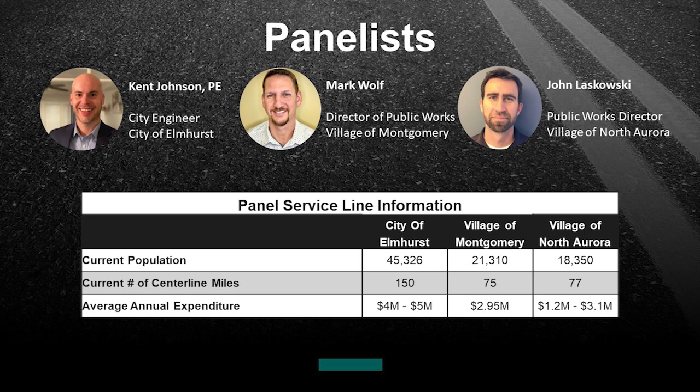Yeah, thanks Tim. North Aurora is located off of I-88 and Route 56. Can you guys hear me back there? Yeah, okay. So our road network is basically 77 centerline miles of roadway. Majority of it's asphalt. We have 3 state highways coming through town - 56, 31, and 25.

The town surrounds the Fox River, and generally that's how development began, closest to the river, and then expanded from the east and the west on either side. We do have some arterial streets that we're responsible for, mainly Oak Street and Randall Road in town. But other than that, the county helps us out by taking responsibility for our larger arterial roads like Orchard Road and part of Randall as well.

The funding sources for the Village of North Aurora are primarily capital funding. So we try to use all of our capital funding on the road program because we can avoid some of the regulations that IDOT imposes on the larger maintenance programs. I've worked in communities where you try to keep the MFT money out of the road program as best you can to avoid those regulations, but I've also worked in communities where you try to put MFT money into the contract, which is a little bit more unusual.

But there's situations where some municipalities have ordinances that might have a local bidder preference, and so there might be a local bidder that may have an advantage if you're using only capital funding, whereas the state won't allow that ordinance into a contract like that, so you're saving a little bit of money by including that IDOT funding in the contract. We also do our best to apply for STP fundings, and we use our MFT to leverage those dollars primarily, and we use MFT for preventative maintenance type activities.

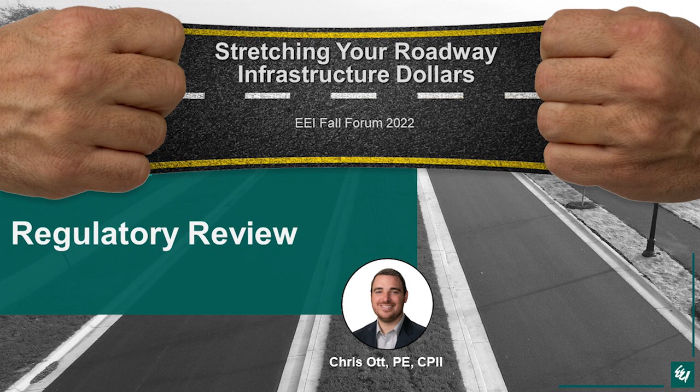Thanks, Brad. As Brad said, I'm going to touch on some regulatory stuff. It all kind of stems around ADA and ADA requirements. So the first thing I want to talk about is ADA self-evaluation and ADA transition plans.

As some are aware and some aren't, it's required for all local governments to have an ADA self-evaluation plan. I think a lot of communities have chosen not to do this because there hasn't really been any enforcement on this requirement or anything tied to it.

As part of the Kane-Kendall Council of Mayors last call for projects, you did get bonus points on your resurfacing projects if you had an ADA self-evaluation and transition plan. Talking to people at CMAP, I'd think this is coming to other councils of mayors too, so it's an added bonus. It's how we leveraged funding in the Village of Montgomery by completing an ADA self-evaluation and transition plan before the applications were due this year, so they got an extra 10 bonus points on all their applications. It's becoming more and more important, and they're pushing it more and more.

So what it is, is the local agency's assessment of the programs, services, et cetera throughout your town, and how your street network, buildings, et cetera, are up to ADA standards. It evaluates your current facilities and programs - obviously your biggest one being sidewalk ramps, typically, but also accessibility in your buildings. It will identify the necessary changes to become compliant, and you're also required to provide a way for the public to participate.

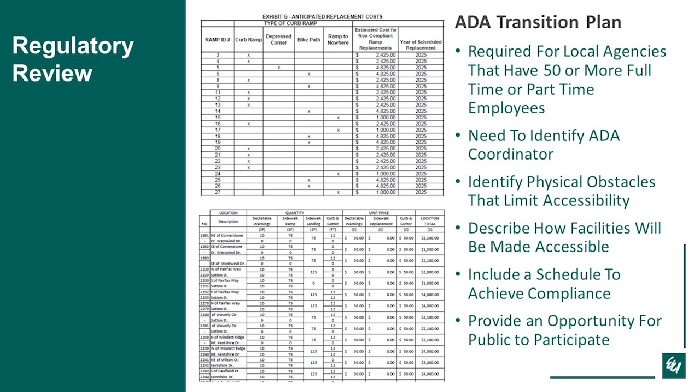What you ultimately come up with is a total cost to get ADA compliant. It's just to have a plan - you don't have to have it done in 5 or 10 years, it's just to identify how you're going to get there. And again, you provide an opportunity for the public to participate. These are becoming more and more important, especially now that there are extra points associated with getting funding, specifically in Kane-Kendall Council of Mayors. I wouldn't be surprised to see this in DuPage or the Northwest or whatever other planning council you're associated with. I know CMAP is doing a presentation on ADA transition and self-evaluation plans coming up, and also a pilot program to help people come up with their self-evaluation and transition plans, just as an FYI.

The other thing to talk about is accessible pedestrian signals. That's becoming more and more of a popular topic and a requirement that IDOT is putting on a lot of their new traffic signals. It's a device that communicates information to pedestrians, usually audibly, and usually has a tactile push button so blind people can understand what's going on, along with an LED indicator light and typically an information sign.

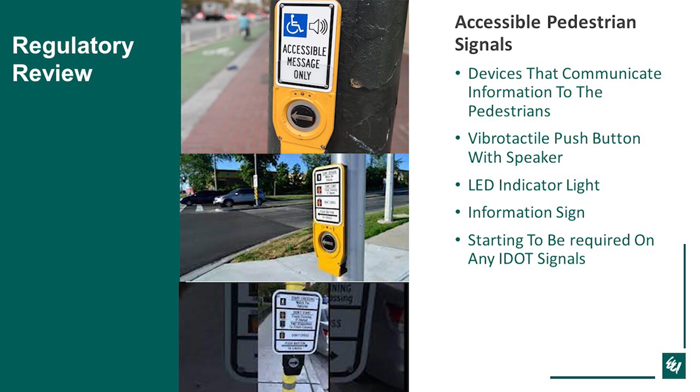So those are some of the things I briefly wanted to talk about. If there's any questions, I'll be happy to answer.